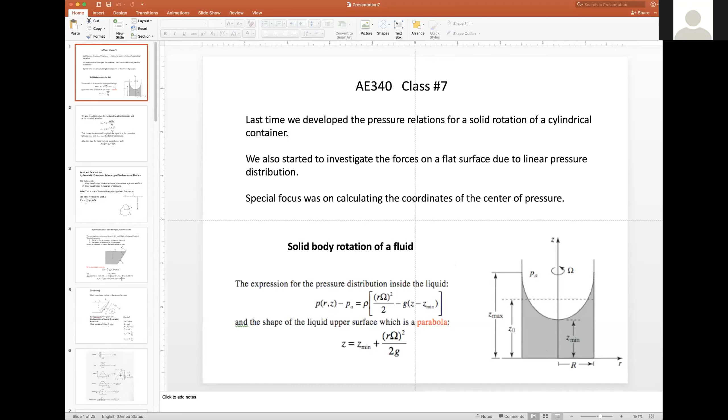Okay, so we start. Okay, let me do a share. Okay, I'll do this one. Okay, you want full screen? Yes, I hear a voice. Yes or no? Yes, please. Full screen would be preferred.

Full screen it is, full screen gives me the pen. Okay, so I usually do a really short summary of what we did before, and we looked at the solid body acceleration of fluid particles. What we mean by that is that all the fluid particles accelerate at once, and then there is no relative motion. So the two cases that looked reasonable for that type of assumption: a container was kind of rectangular, accelerating in one direction, and then the surface kind of aligned in a straight line according to the acceleration.

We answered the question about what is the pressure inside the liquid and what is the shape of the surface. It turned out to be a straight line. And then we also showed that you can actually skip all that and just look at the depth at that point and use the old formula rho G H.

Then we did the other case of acceleration, which is rotation, where we have centrifugal or radial acceleration, that's the proper term. And we solved that case, and we've seen that the pressure everywhere is described by this formula here. Right here, that's the formula, we developed that.

And then we tried to see what is the shape of the upper surface, and hey, we got that one. Turns out this is a parabola. And actually the difference between the lower point and the higher point, between these two, that distance is this term.

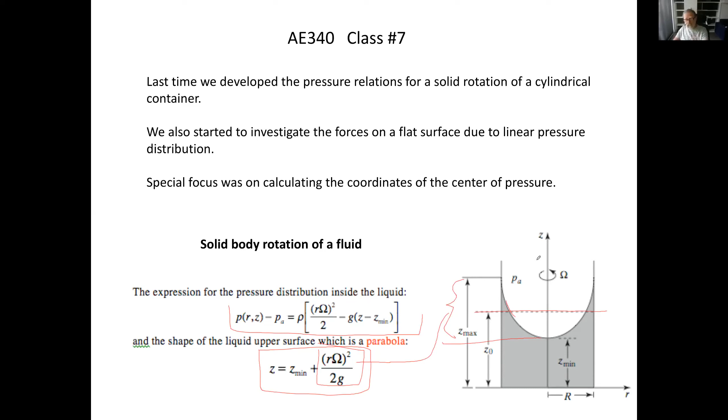Here is exactly what it is. So we can take the average, look at the average height of the container when it's not spinning, and then the minimum is going to be minus that quantity, which is, remember, it's divided by 4g, which is 1/2 of the 2g we had before. And the same distance up in order to get the maximum height.

And then again, here I mentioned that we can use the good formula that the pressure is actually changing by the depth, rho g. So it's the same condition. Okay, so that was done last time.

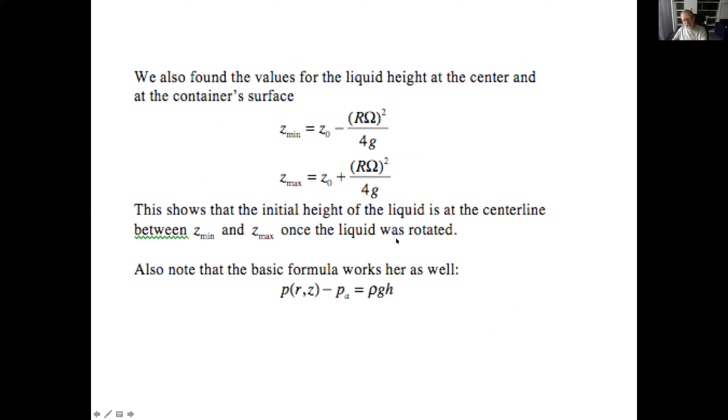And then I started the more important part of that particular chapter, which is the forces due to the pressure variation. So we looked at a pool of water, and there's a depth h like before, nothing new. There is an object. What happens? Somebody stepped on your toes.

So naturally, we said that delta F is equal to the pressure, delta P, the pressure over there, multiplied by the area. That would be in the direction which is normal to the surface. And if you want a vector form, and you know what the unit vector is, and we want it in the x direction, then we have to take the cosine of that, which is simply that product, the scalar multiplication, right here.

Instead of doing complicated shapes with really complicated normals, what can happen is this normal can vary with the shape of the object, and the integration becomes pretty complicated. So we try to avoid that, because the message is how to get the forces and how to calculate the pressure, the center of pressure, which is the important part.

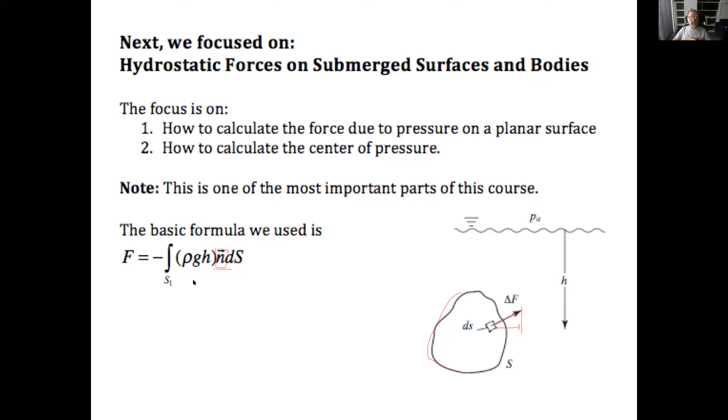So we decided just to go with a straight surface. For that purpose, we ended up with a very simple model. So this is our simple model. We said, okay, here's a container, a pool you may call it, and it's filled with liquid. Say water, it's a pool in the backyard. And there is a plate here, a surface, which is a solid surface. And it's planar, it's flat. Then somewhere here, there's going to be an area.

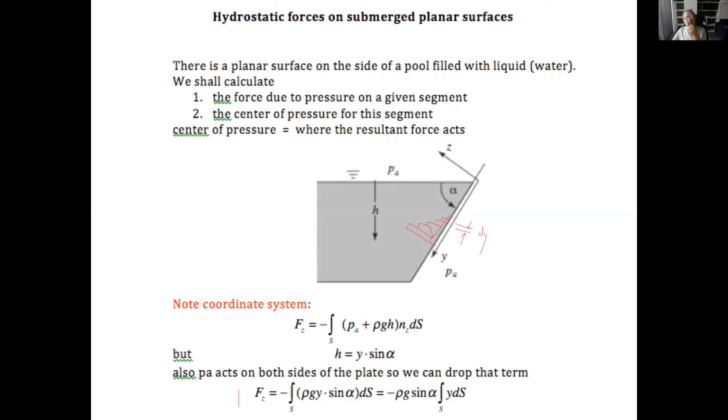And that we can really simplify the problem. So how, and I don't want to repeat the formulas, but here's the result. And the result's actually going to help us solve problems very easily. Now, I mentioned again to the question you started earlier, what you need to know for exams and homework. And yeah, I developed the formulation, but at the end of the day, this picture summarizes that particular topic. And I expect you to be able to use that page and solve problems, which we're going to do in a minute with the examples.

Here is some shape, which you can, okay, I touched the mouse, so yeah, okay. I have to pay for that. Let me get the pen.

Okay, so here is the surface that we're interested in. Sorry, this one is here, and this one is here. And the surface we're interested in here is that. So imagine that this is the shape of the surface, and this is at the back of that pool. Okay, so now here's the process. So we did the integrals and all that, but now we want to make it simple. So step one, find the centroid of the area. Okay, step one.

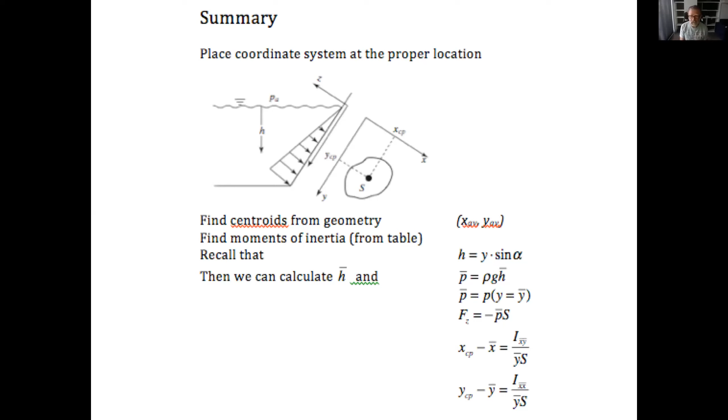You also have to find the average Y based on that formula because they are related. Here you have Y average and not H average. Then find what is the pressure at that point. And from here, it's smooth sailing because the force is going to be this average pressure times the area. And then the shift in the center of pressure, in the X and Y directions, are given by these. So you have to look up the moments of inertia. If the body is symmetric, the X shift, the IXY, is going to be 0. Again, statics, dynamics, I'm counting on you that you did that before.

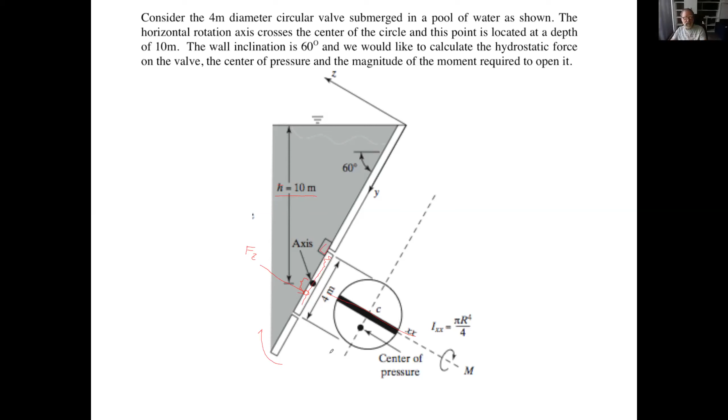Okay, so you understand what I'm saying? How much is the moment to open? So it is not going to push on that little piece which is stopping the valve. This is the stopper. Okay? Makes sense? Clear? Okay. All right. So that's the question. So we're trying to mix mechanics and hydrostatics. All right. So let's follow the same procedure.

So we can actually answer the question about the force almost immediately because we know how deep the centroid is. For a circle, this is the centroid. Oh, I touched the screen again. I keep on making mistakes. I need to catch the pen first. Okay. So we know this is the centroid. This is a circle. The centroid is the center, no rocket science. How deep is it? 10 meters.

So what is the pressure at that average point? Rho g h. Again, density of water 1,000. Gravity 9.8 meters per second squared. And then the depth is 10 meters. And here's some number which is Newtons per meter squared. Okay, we got that. What is the area of that valve? It's pi r squared. R is 2, so it's going to be pi times 2 squared, and this comes out 12.56.

Okay, so now we know what is the area and what is the average pressure. Therefore, the force is going to be minus, of course, because it pushes in the minus direction. This is the magnitude. So what is the force? Pressure, here's the number, 9.8 times 10 to the 4th, times area, and we get minus 1.23 times 10 to the 6th Newtons. Why the minus? Because it is acting opposite to the z direction, which is positive acting into the pool. That's how we figure that one out.

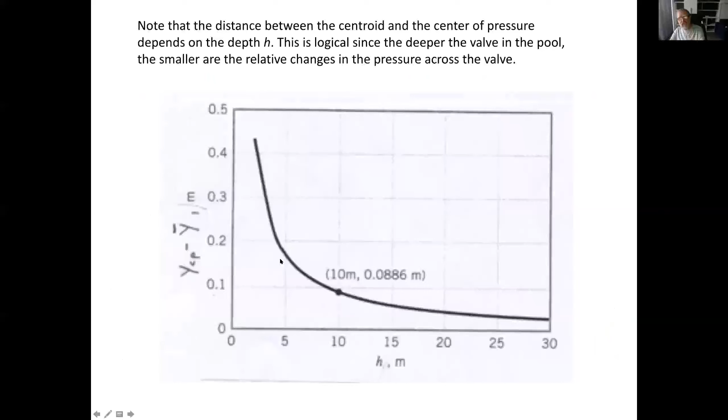Okay, so let's see the formula. So we have only Y, the shift in Y down, in this case, moment of inertia. What is the moment of inertia? It's going to be the width times height to the third divided by 12. If you have second thoughts about it, here it is. This is the moment of inertia: width, how wide it is, times how high it is to the third, divided by 12. So this is where we were. So that would be the moment of inertia.

Y average, we just calculated Y average here, 3.1. And then the area, we calculated at 16. The shift is almost half a meter, 0.423. And now, the force, let's go back. Oh, I already have the plan. So we have a force, and this is the centroid. This is the force, Fz. And then this distance is 0.423.

Okay, so what I can do is moments. I took moment about this axis here. So the moment in this direction is going to be F2 times the distance, which is 4. F2 times 4. And then the moment in the other direction is going to be Fz times this distance. Fz, which we calculated right here, times the distance, which is 2 plus this thing, so 2.423.

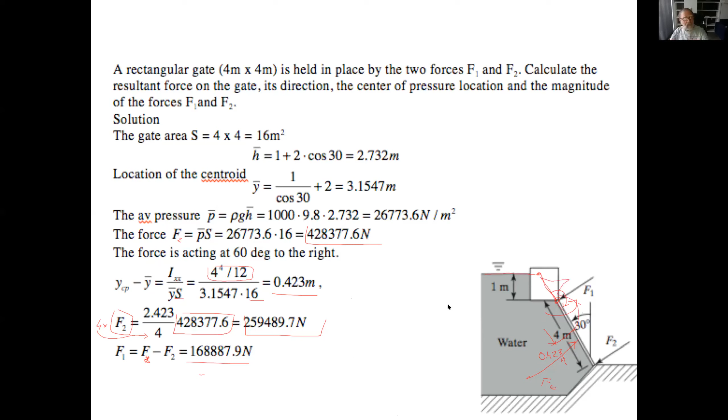Let's do another one, which I believe is the most complicated. This is also in the book, and it has two elements. It has an asymmetric area, which we need to calculate the forces on, so we're going to have mixed moments of inertia. And also, the origin is not at the pool itself.

Okay, so we have a pool where the shape is shown here. This is the shape. And then at the bottom, there is a 30-degree flat surface. And in that surface, there is a triangular plate. We can call it a drain valve or whatever. And we would like to find out what is the force and what is the center of pressure in order to find out how to support it, what kind of forces to apply and all that.

So the problem is given that the top tip, the apex of that triangle, is located at 5 meter depth. Let me see, I have the pen, yes, I have it. So this is at 5 meter, which is here. And then the base of the triangle is located at 11 meter. Okay, so we kind of know where that thing is, okay? And then we know the shape, which is 12 meter by 6 meter. That's the shape of the triangle. This is a right angle here, okay? It's a right angle.

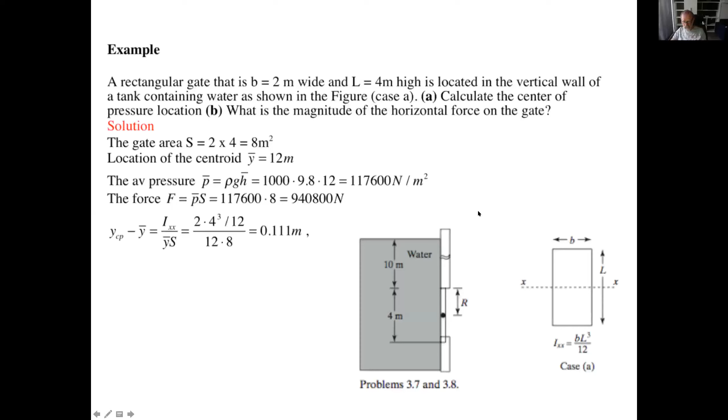So let me just go back to that table we had before, this one. So we're gonna face that case. So assuming that we know the centroid, which is 1/3 of the height, okay? And it's on the bisector, but if you look based on the base, it's gonna be 1/3 and 2/3. The same story. Now, moment of inertia about this axis here is going to be base times the height to the 3rd divided by 36.

The IXY is going to be B, which is the base, times B minus 2 times the shift, okay? And then L squared. So instead of L third, it's L squared, but we have another B here. So if this triangle is a right angle triangle going all the way to here, then in this case, B is equal to S. So then what is here is going to be minus 2b, so it's going to be minus b here. So it's going to be minus b squared L squared over 72. Are you good with that? That's the trickiest part of the whole thing, okay? Which is simply statics or dynamics.

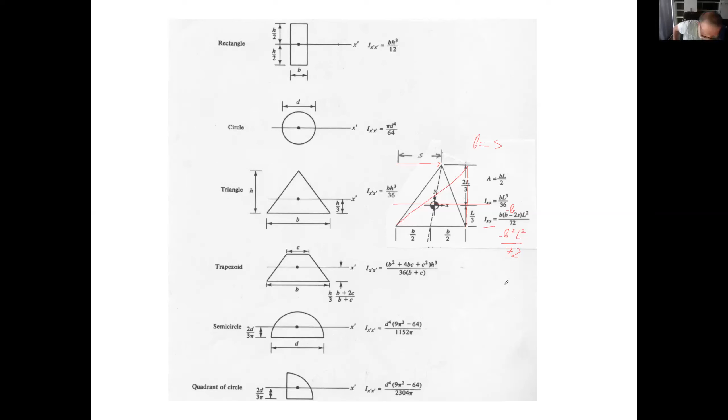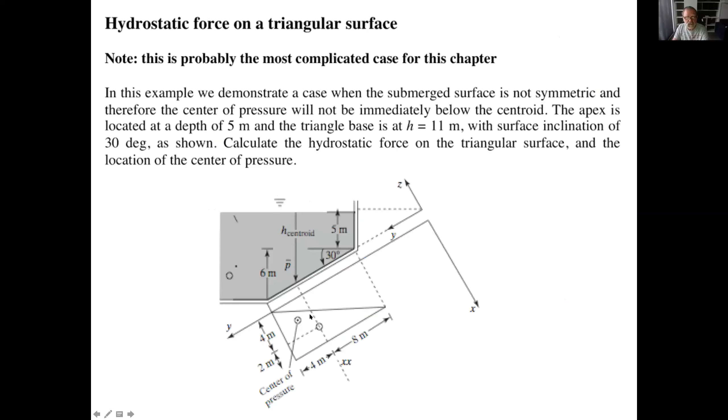So let me go back to the problem. Okay, here we are. So we presented that one. There is a mixed moment of inertia. Let's try to solve it. The solution is gonna be pretty easy. So let's see, the centroid. How deep is the centroid? We have 5 meters. Let me get the pen before it jumps on me. We have 5 meters, the depth. Then we have this distance, which is 8 sine 30 degrees, right here. Turns out it's 9 meters. Sine 30 is 1/2, so it's going to be 4 plus 5, it's 9 meters.

Average pressure at that depth, H average, okay? This is our H average. We call it centroid. Rho g h, that's it. That's the pressure at the center of the triangle. What is the area of the triangle? Base times height divided by 2. We know that. What is the force? Area times average pressure. Average pressure we just calculated here, area we calculated here. And then minus, because the force is actually going to act below that. This is going to be Fz.

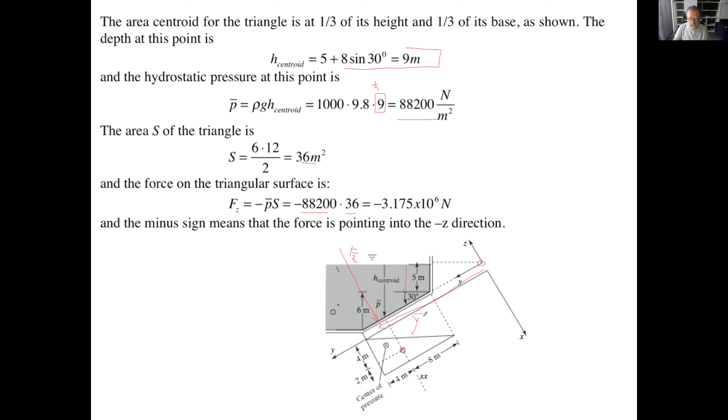Very simple, okay? Exactly the same thing. So what are the tricks in this particular case? You have to place the coordinate system here. Right now, the y-average is not important. This is the y-average, but the y-average will show up in the moment of inertia, so you have to be careful about that. Okay, all right, let's go on.

All right, so I just brought that page again. So IXX, I'm looking at the table, I just brought up the table. It's base, height, base is 6, height is 12. We'll pick up the pen. Here we go, base, height to the third, divide 36. Everyone can do that, no problem.

Mixed moment of inertia. It's going to be B, which is 6, another B, which is 6. S, the shift is all the way to here, therefore our S is equal to B. Therefore, minus 2B, this ends up being minus 6 or minus B. You multiply and you end up with a minus sign. The minus sign in the shift means that, let's look at that picture, means that there's more area here and there's more pressure here because the pressure increases like that, linearly.

So remember our x-coordinate, the x-coordinate goes this way, this is the x-coordinate, and relative to the center, so the x-coordinate would be here, we're going to shift the center of pressure by a minus quantity, not positive. And therefore, this minus quantity is going to be, the shift is this minus 72, the moment of inertia.

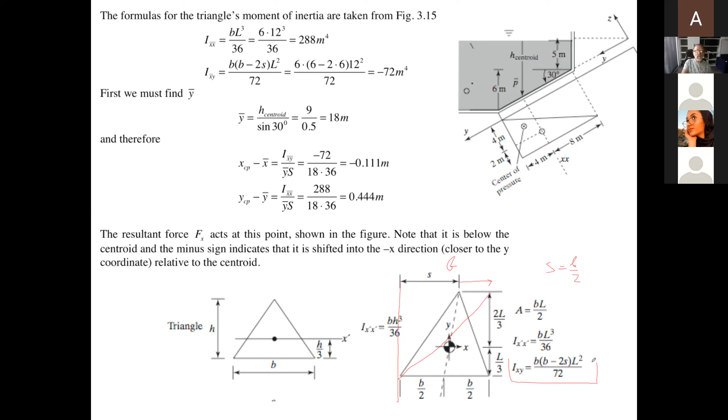So it has to be with the moment of inertia. Okay, I'll move on. So in the book, I actually included a chapter for more complex shapes where you have to integrate the surface shape. But okay, so here's a quick summary of what we did so far. I expect you to be able to solve problems like what we did now, okay?

Now, we're not going to have curved surfaces, but this is for you guys, you're going to be engineers, and if you need to make a back of the envelope calculation, you can do it without really doing heavy integrals. So the way to look at that, if you have a curved surface, you just take the projection of that surface, find the centroid, multiply by the average pressure, and then you know what is the force on this surface. So that would be Fx or Fz, depends on the coordinate system here.

The force to this direction is actually even easier. You have to calculate the weight of the fluid above that surface, okay? So if this curve is given, you can calculate the area here, then you know what is the weight of the fluid in this area, and in the other straight areas, you just go with a straight line, so it's going to be a square. So you calculate the weight of the fluid. This is exactly like we had the bricks, you remember at the beginning?

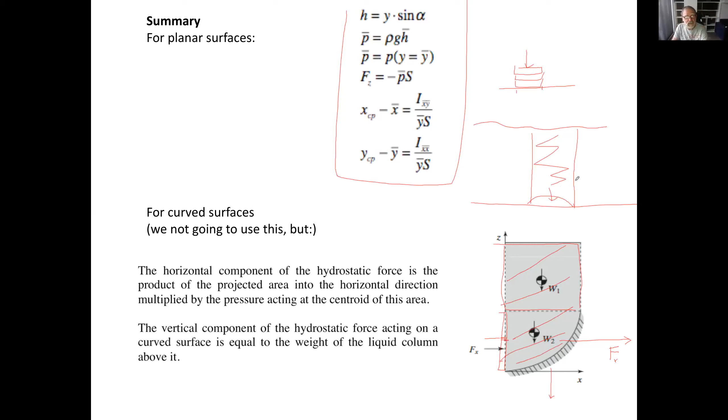So we need to talk about buoyancy. This section is going to be super easy because Mr. Archimedes figured that one out, well, let's say 2,000 years ago, okay, maybe a few years less. He figured that out, and he made some statements which are extremely accurate.

One more time, we're looking at several cases: the floating object, the submerged object, and something at the bottom of the ocean. I already mentioned that the force on that guy is going to be equal to the weight of the water pushing on it, as long as we assume it is glued to the ground, to the floor. If there's liquid underneath, this is the formula that applies.

So Mr. Archimedes, or we can call him Dr. Archimedes, I don't know if in those days they gave doctors. Was he with Alexander the Great? Anybody who's into history, just remind me of that. Anyway, I think it's the same time frame.

Anyway, so he said that anything immersed in the fluid will experience a buoyancy force, the lift force, which is equal to the weight of the displaced fluid. That's how the ship floats. And if it's inside the water, it still experiences a force equal to the weight of the water that was displaced. Same thing.

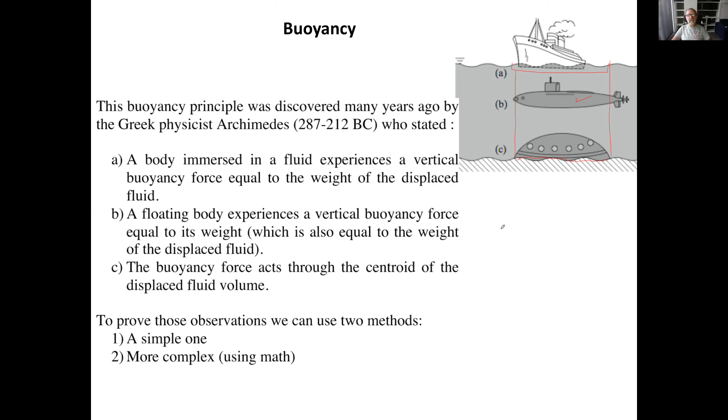Anyway, let's try to prove those observations and do a few examples. Again, this is just to close this chapter about hydrostatics, and we have to pay attention to that. You guys studied that in high school, if you did go to high school. So I try to prove the first and second observation of Archimedes, and there are two ways: a simple way and a more complex way. The simple way is this.

So we have, I put a rectangle shape, which is very simple, a cube, okay? It's rectangular, has an area S, and the same area is at the bottom. And then the force pushing it down, which I call F1, is rho times G times H1, which is the pressure, times the area S.

We can look at the bottom, and there is a force acting on the centroid of the lower surface, F2. No rocket science here, it's going to be rho G H2 times S. Obviously, F2 is larger because it's deeper.

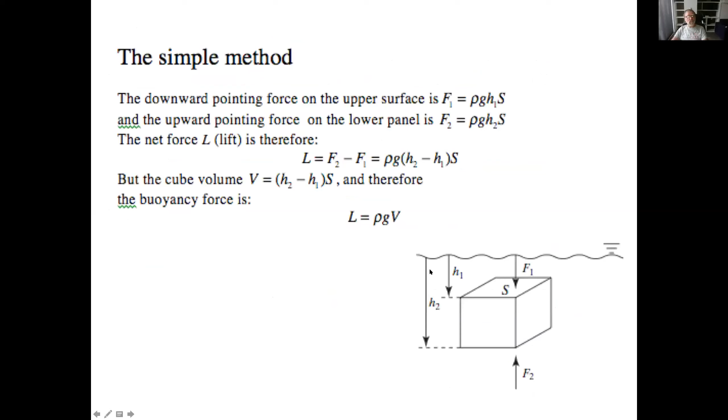At that point I'd like to conclude the discussion. Any questions for today? You're very quiet - how many of you do I still have? Some of you are running away, I have about 110 of you or so running away. We're physically here, some of the brave people are still here. I'm still watching, thank you professor.

I have a question - it's about the format of the exam. Whenever we have the exam, how is the format going to be? Is it a question or couple of questions from each chapter, or do we send pictures in? How are we turning this in online? Okay, luckily I did half a semester last semester, so what I did is posted the exam on Blackboard exactly at the time, and you had an hour or hour and a half to do it and send it to me. You have to raise your right hand that you're not going to have grandma helping you.

Something like that, sounds good. Thank you, and it worked. You're trying to show what you know, not what other people know - this is supposed to be the honor system. Again, we're in a different time now with the pandemic, and this is what we're trying to do. I can send the police to you, but then I'd need a huge police force with 150 students - it's not practical. Thank you professor, I appreciate it, okay.